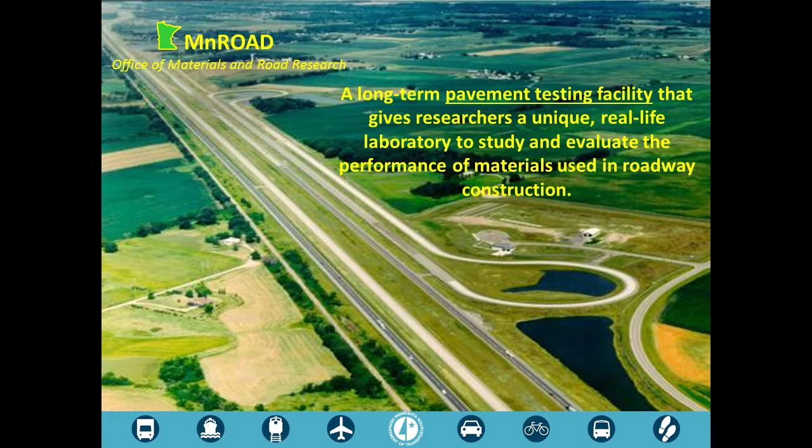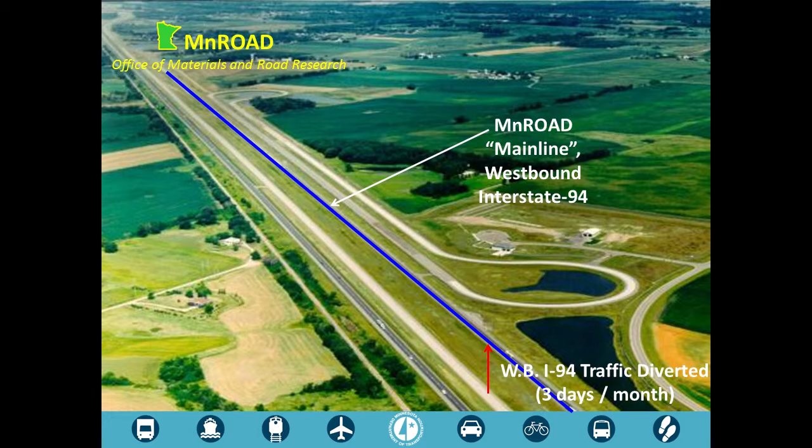Quick summary of MnROAD, which is about 45 minutes from the office where I work. That's the existing Interstate 94. We also built a parallel 3-mile long section which takes the westbound I-94 traffic. We can divert it back to the original I-94 when we do our testing out there. So that's kind of what we call our main line. I think we're just a little under 1 million ESALs per year from the traffic on the interstate.

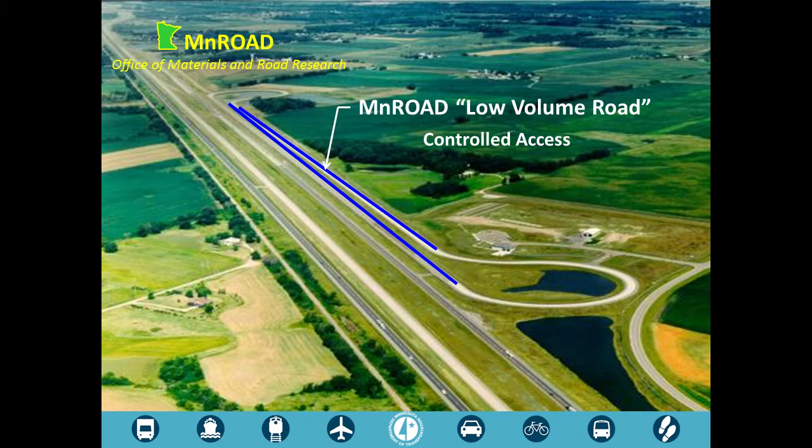We also have our low volume pavement for our local government type work. We have an 80,000 pound truck that runs there about 80 laps a day, so that's how we load the low volume. It's a closed loop. The MnROAD cells are 500 feet long, asphalt and concrete. We do a lot of rehabilitation work. And we're kind of getting to the end of our second phase. I'll talk about the cracking group and then future plans coming up in 2018.

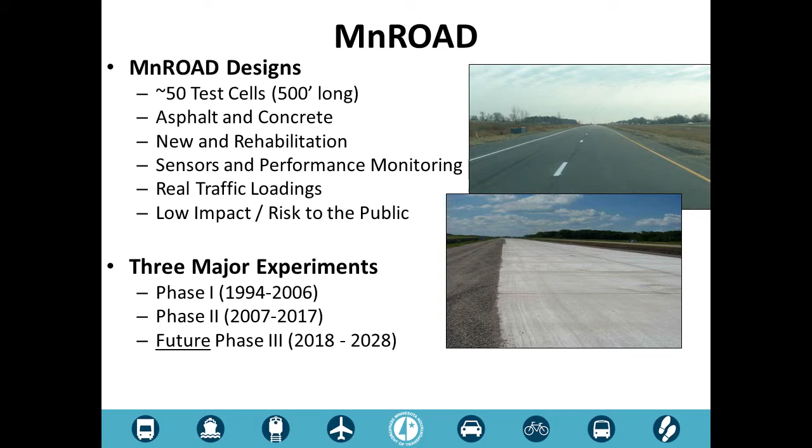Benefits, so we've been able to generally put some decent numbers on the amount that we've saved from the work we've done at MnROAD, phase 1, phase 2. I hope we'd get some similar benefits during the third phase coming up.

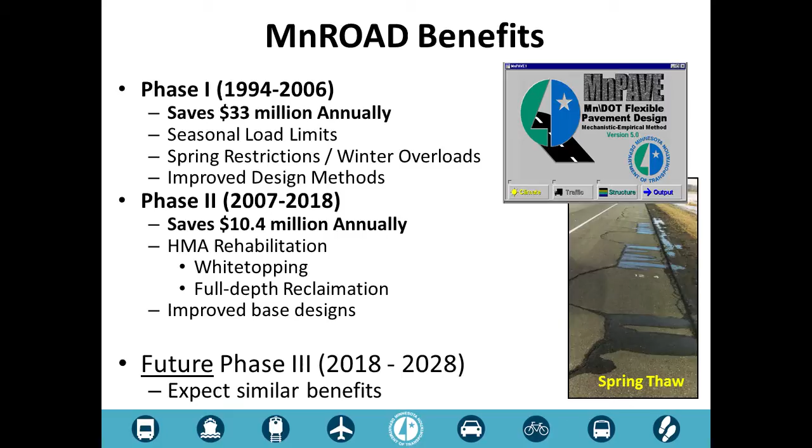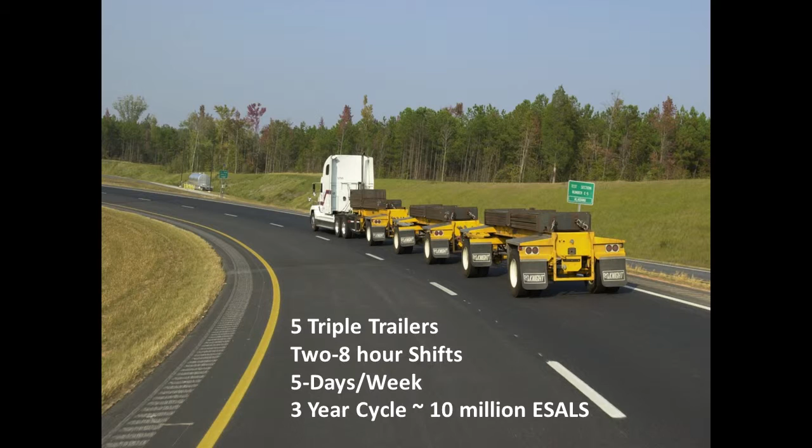NCAT was established in 1986, so they have a 1.7 mile oval. Their test cells are 200 feet long, and they run about a 3-year cycle. So the first 2 years, they put 5 million ESALs a year on with their triple trailers. They run Tuesday through Saturday. That lets the workers get out there Monday to do a lot of their capturing of their distresses. So they call it a 3-year cycle.

The first 2 years they get those 10 million ESALs on, and then this summer the traffic doesn't run. That's when they did all their construction for the new sections. Many different partners have been involved in NCAT through the years. This is the cycle that just completed. So they've had 5 3-year cycles. Now we're up to the 6th one.

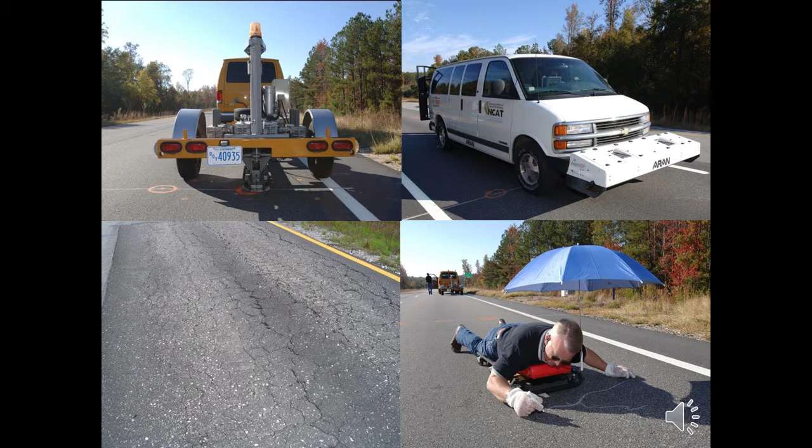So the FWD testing, ARAN van, you can see, and there's Buzz down on his, I think his cart there for working on cars, but also working on pavements. An awful lot of detailed crack measurements. They've done a lot of great things down there with their FWD testing and looking at the different cells.

Lab testing, they got a full lab and they're doing a lot of mixture testing throughout all the development of the work in the cells, the materials that are going to go down on the track. They do a lot of pre-mixing, running the entire mix through the plant before things get going. And here's our group of the NCAT workers there. So that's kind of a quick overview of MnROAD and NCAT.

But to come together to do the preservation work, NCAT had their Lee Road, low volume pavement. They just put preservation down on a high volume pavement, US 280 down there. But to really facilitate some high value research, cold and warm climates. Buzz has said that the board of directors at NCAT won't be putting any concrete down anytime soon, never. So we've got some of that we can look at up at MnROAD.

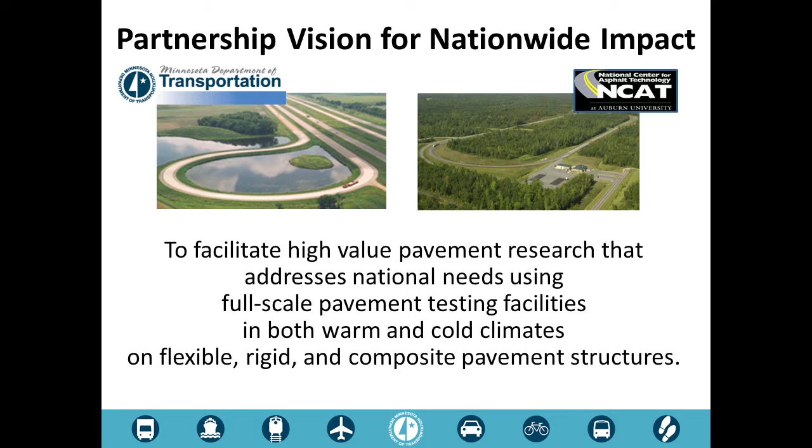We've done a lot of work informally in the past, but the NCAT folks came up to MnROAD. We went down there in October. We've kind of got this process being formalized. MnDOT's actually going to be a subcontractor to Auburn University, which runs the pooled fund for NCAT. FP2 and the National Center are also participating in the work.

So really working on the strengths of each organization, agency. The professors that work down at Auburn University are just great. We're going to be generating a lot of data analysis. I think NCAT's going to do a lot of the analysis work, even from the data we collect as part of the partnership, using the same processes that they've already set up and established.

Kind of the preservation group and the national cracking study. The preservation work will not be down on the actual MnROAD site. We've got a high volume and low volume section picked out where we will be constructing ourselves next year. The national cracking group, so the northern states that are in the pooled fund, we're going to put down some 8 or 9 new cells up at MnROAD next summer as part of the cracking study to look at mainly thermal cracking, which is our biggest problem in the north.

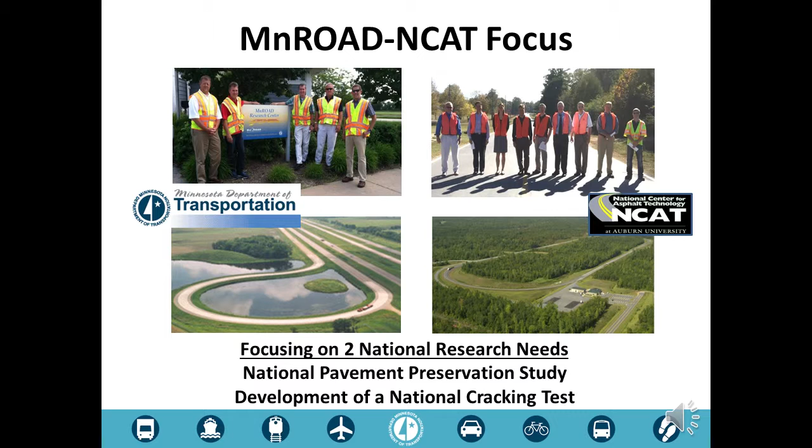Most of the work down at NCAT for the cracking study is going to be on fatigue and top-down cracking issues, because thermal cracking is not a problem for them. So it should be interesting to see what comes out of all these studies. We all know the right treatment on the right pavement at the right time. And here's kind of what we're looking for.

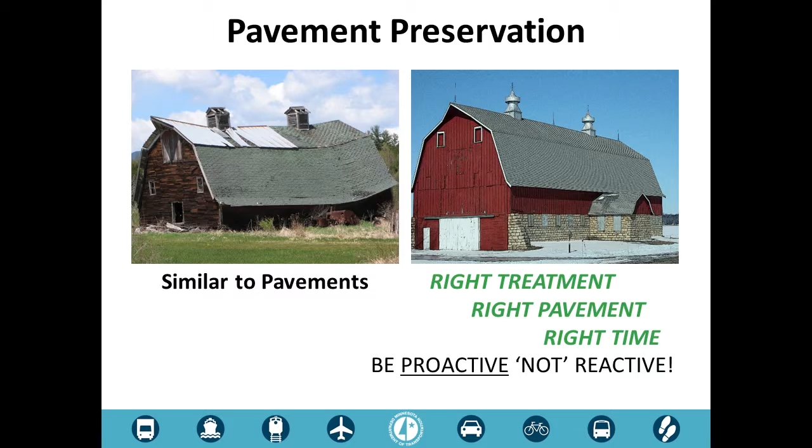An important part of the preservation studies is to realize we're going to build many different cells, but we're not comparing treatments. What we're going to try and look at is how the life extension of the individual treatment is measured, trying to find those life extending benefits. So you put a chip seal on the road, how much longer will that pavement perform until it returns to its pre-existing conditions. So not comparing all of the treatments to each other, but to the life extending benefit.

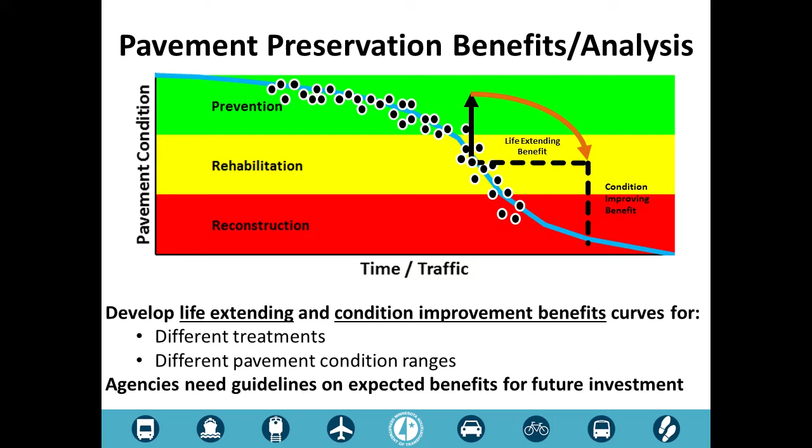This is just some pictures from down at NCAT in Auburn, Alabama. So Lee Road, their test section goes into a quarry there. So there are empty trucks coming in, loaded trucks coming out. So it's quite unique, probably a factor of 10 in ESALs per year. You know, like 30,000 going in, 300,000 on the pavement coming out. It was 14 years old at the time that they started their test cells a couple of years ago.

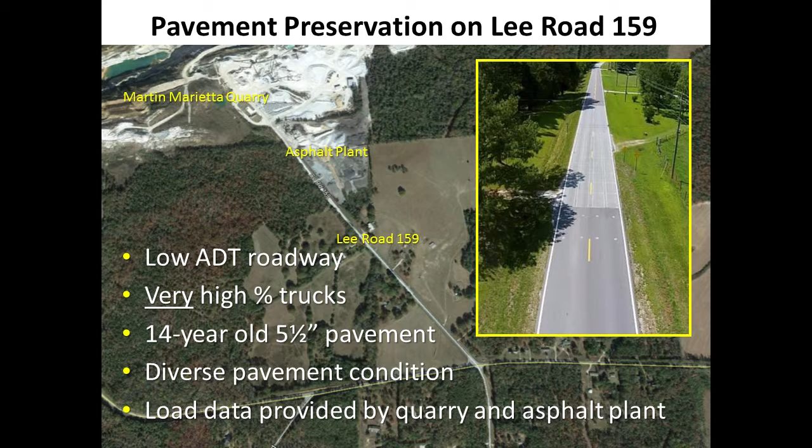They've even got some overhead video that shows the different cells, takes a nice look at it. These are all the different test sections that were put down on Lee Road, and really the goal for the Northern Preservation Group then is to duplicate as many of these, almost all of them, up in Minnesota. We would use the MnDOT specs. We would build them with our emulsions, softer base emulsions, locally available aggregate and things.

But you know, NCAT does a chip seal, MnDOT does our chip seal. We've got a little more embedment. So there are some differences like that. But the important thing is that we want to build the treatments in Minnesota to perform as best we think they will. So we'll follow what we've typically done up north here.

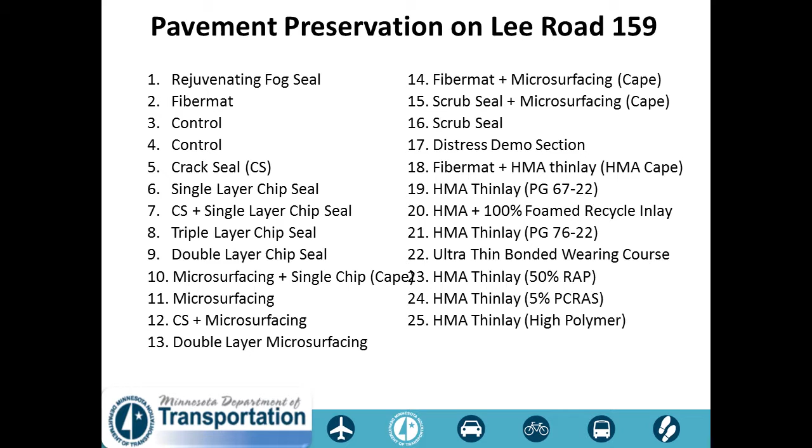And a lot of the hot mix asphalt overlays are 4.75 mixes, which we haven't been doing in the past, and they seem to have great performance. So I'm looking forward to seeing how the 4.75 mixes perform, which need to be put down with a really great tack. So tack's extremely important.

So on Lee Road, all the distresses are recorded by NCAT: the rutting, roughness, texture, friction. They do a lot of FWD testing. Subgrade moisture, which is kind of important. We heard Crafco talk about sealing cracks. Keeping the water out is going to improve the strength of your whole structure. So some of these treatments have crack sealing, then a chip seal and different things, but the microsurfacing, crack seal, then the overlays, they do a great job of sealing up the surface, which improves the entire strength of your structure.

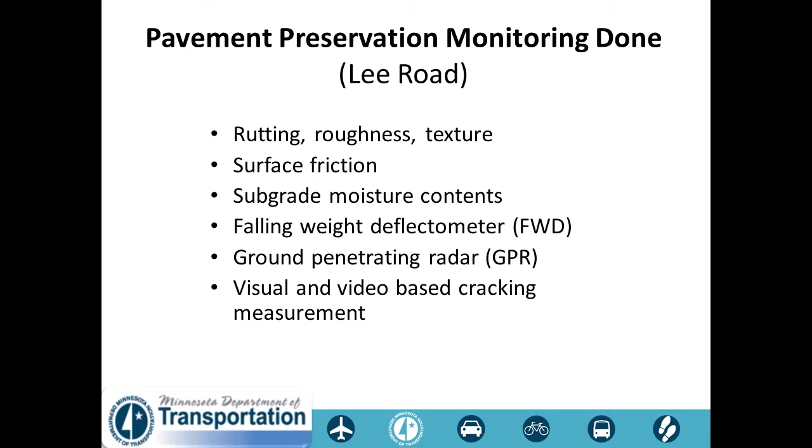Doing similar analysis type of work. They show their high volume road on US 280. Ours is going to be up on 169, in central Minnesota, doing control and treated sections. We're going to work on, I think, some county roads, probably a couple different ones to get all our sections in there. So quite a few treatments to be evaluated.

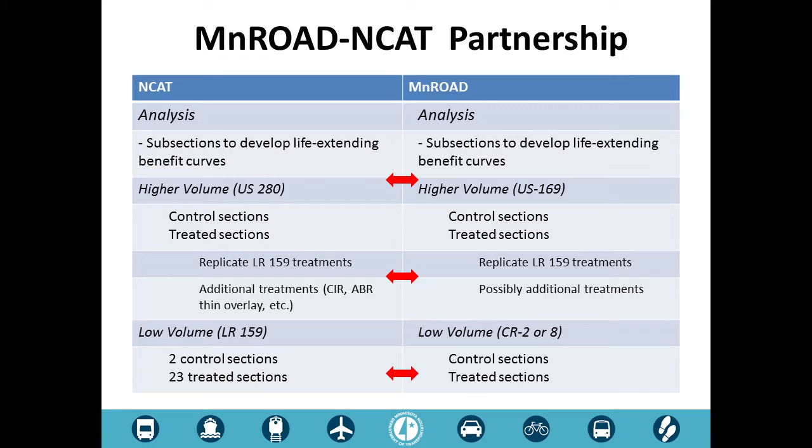Just another summary of, probably a couple different controls. Pick out a control that's maybe in the better condition, a control that's in the worst condition. Then these treatments will go on all the ones in between, and we hope to lay out the treatments in a manner that we would typically apply them in the field. Putting the preventive maintenance type activities on the ones in better condition, and some of the thinner overlays and things on pavements a little farther down the decay curve.

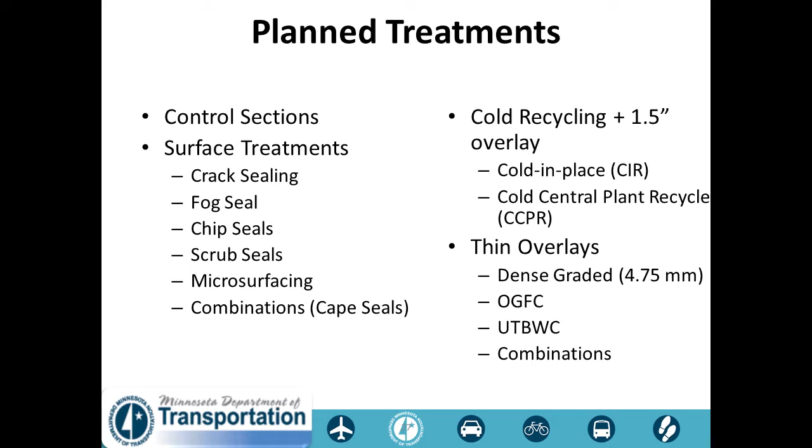Open graded friction course, one we've had a lot of discussions about whether we do that up north, because right now none of our DOTs in the north are using open graded friction courses. So US 280, I think a little over 4.6 miles there, 1/10 of a mile sections, so that's longer than the Lee Road type of work. I went down to NCAT and looked at some of the work as they were preparing to do that. They were doing some micro milling for the OGFCs when I was down there.

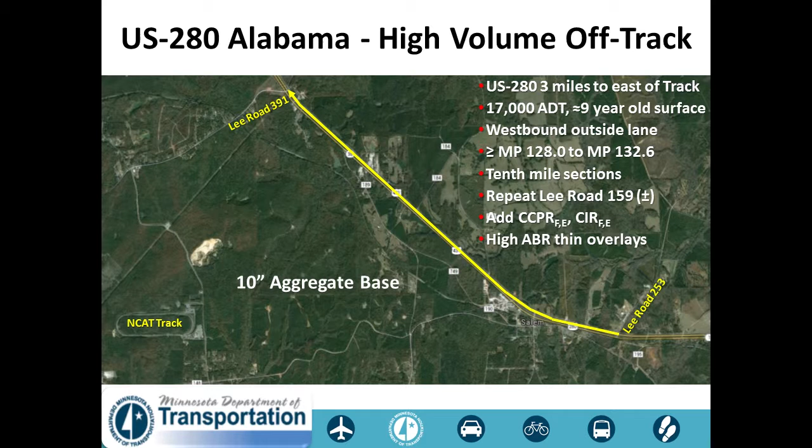Interesting, the first two days were probably very nice and mild compared to a typical southern day, and on my last day down there, when I walked out of my hotel room, my glasses steamed up. I said, that happens to me in Minnesota winters all the time going in, but that was a nice tropical summer day that they're used to all the time, but oof, it was nice and warm.

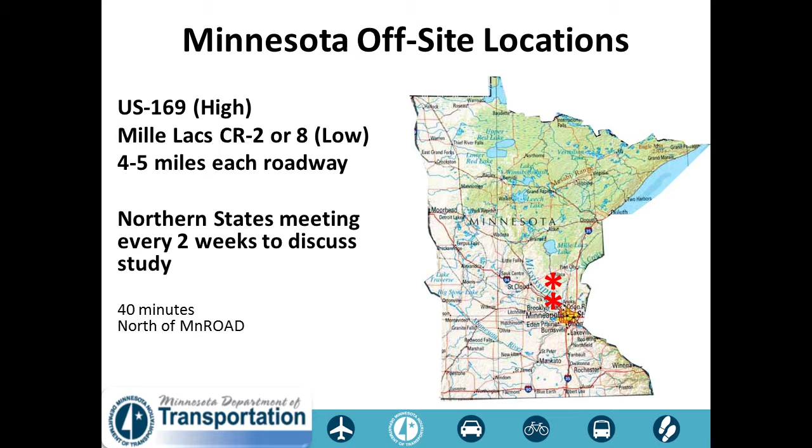Vance Brothers, who did all the work for the preservation treatments down in Alabama, is going to come up to Minnesota and do the same treatments. All the preservation work, the hot mix overlay, hot mix materials put down by a different contractor, and we'll line that up. The cracking group, a lot of different disc-shaped compact tension tests, that's the DCT.

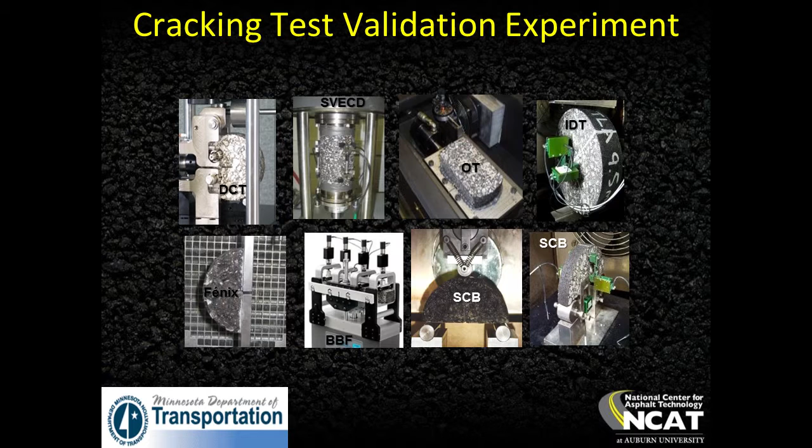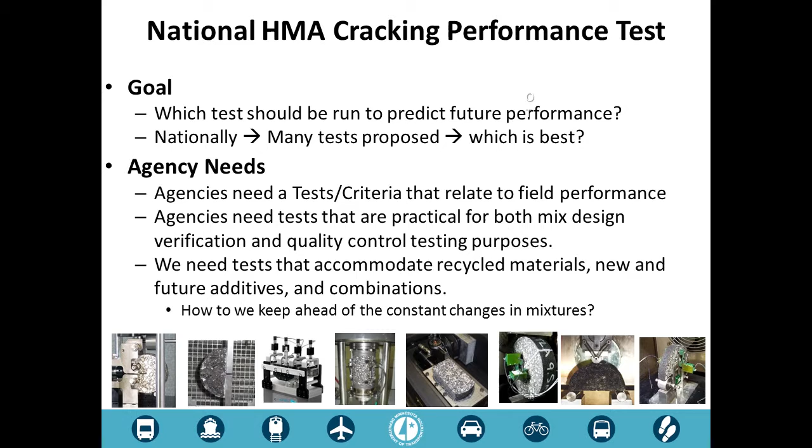So with NCAT putting their 10 million ESALs on their cells in a 2-year cycle, there really should be some good benefits there. And up in MnROAD, our 1 million ESALs per year at the MnROAD site. So that's the groups in the cracking group there. Some of the top-down cracking tests.

So they've surveyed their partners in the pooled fund to look at the different tests that they're going to run down at NCAT on all the mixes, which they're probably really gearing up for right now. All the work on the test track has been completed. I think just within the last week, all the US 280 work was done. So the extraordinary effort that it takes to get all the cells reconstructed and the preservation cells in place is done, and now comes the work of catching up with all the testing.

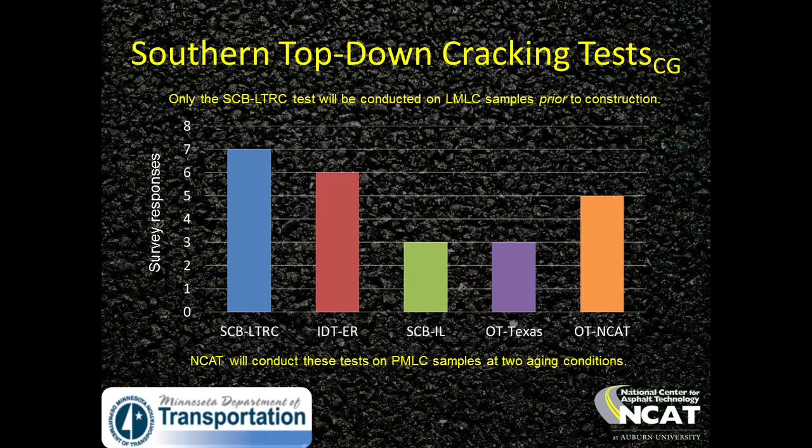Northern group with that fracture energy, which is measured by the DCT test, they're kind of looking at filling in a matrix, and fracture energy measured in joules per meter squared. And up in MnDOT, we kind of think having 400 joules per meter squared or above is a mixture that's going to be much less prone to thermal cracking. So we're trying to fill in a sort of high, medium, low type of matrix with different amounts of RAP or recycled materials that'll help us develop mixtures that are resistant to thermal cracking.

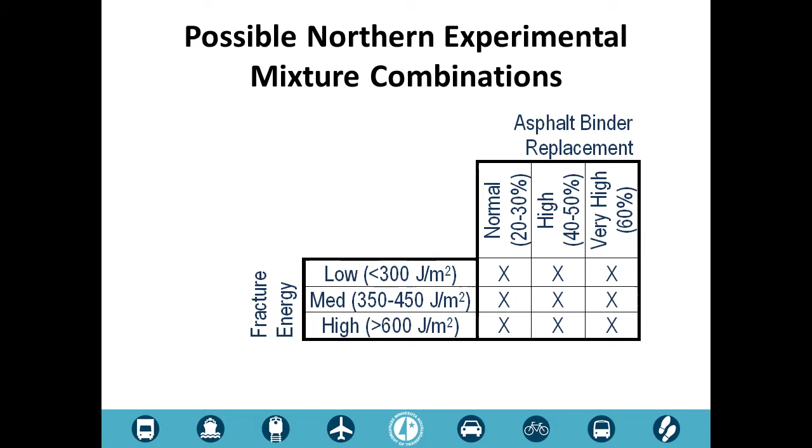The cells up at MnROAD, kind of 16 through 23, are likely to be all reconstructed as part of the cracking group study. Maybe resurface cell 1 and 15. All those final details will be ironed out over the winter.

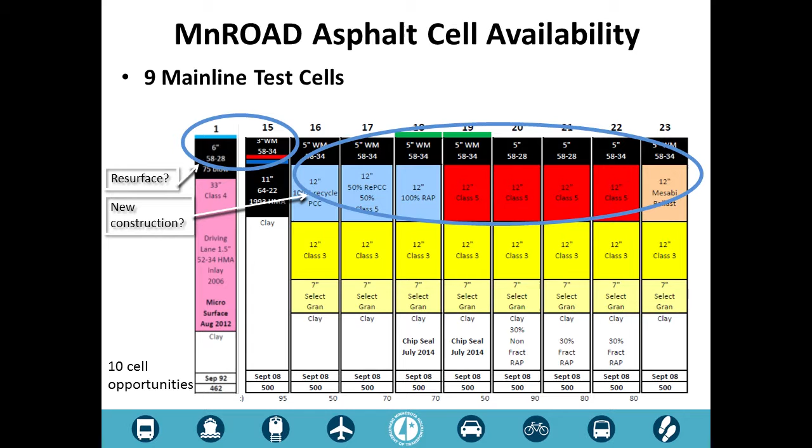So our timeline this fall, which I guess is fall for NCAT, in December, I believe it's the 9th and 10th, all the states in the pooled fund will be going down to NCAT to meet, go through the work that was done this summer, kind of their sponsors meeting, so we get an update on all the activities down there and talk about the work moving forward.

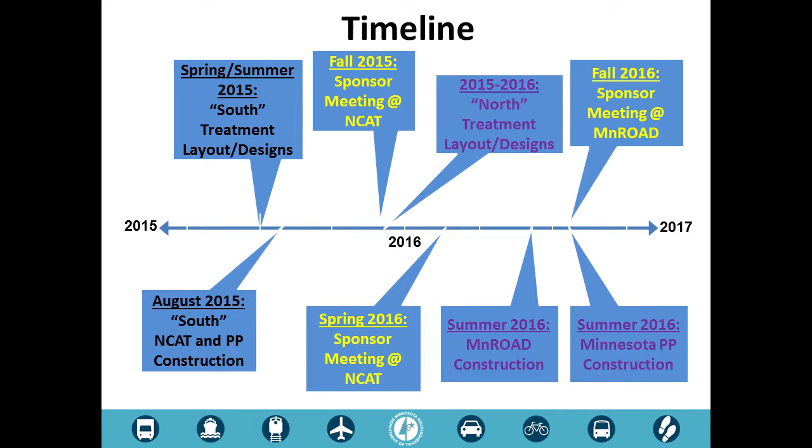To join the pooled fund: there's one pooled fund that has always kind of been NCAT, and there's really about 6 or 7 different projects that states are now participating in. The preservation group, the states that joined committed $120,000 per year for 3 years. There'll probably be a smaller amount, not set up yet, for following years. The cracking group, the reconstruction of those cells is going to be a little more costly, so that's at $210,000 a year.

There's also still within the NCAT pooled fund the work on the test track and quite a few different pooled funds or agreements that you can join, the continuing monitoring and evaluation, the rebuilding of the test cells. So the NCAT pooled fund is a big pooled fund with a lot of activities and agencies. You can check it out if you're interested in joining the pooled fund.

Also, within MnROAD, we've set up our Road Research Alliance, a new pooled fund at MnROAD, to look at some of the future work that's going to be going on at the MnROAD test facilities. I think it's Minnesota and Michigan in there right now, but that'll be used to help reconstruct some of the other cells that aren't done during the cracking group.